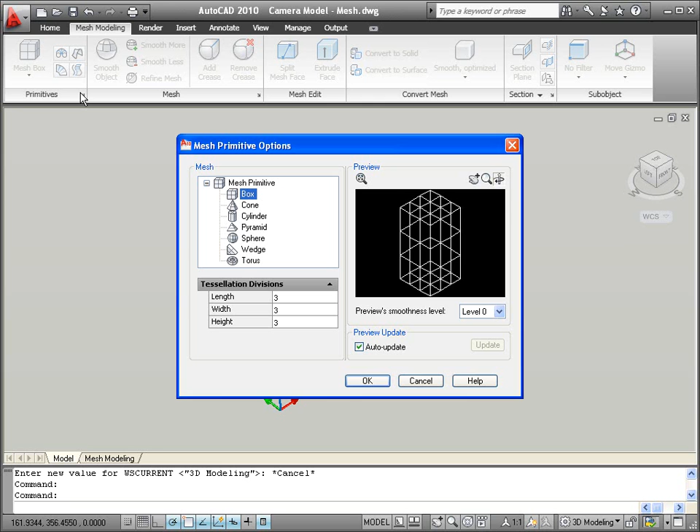You can specify default tessellation values for each type of primitive. To design the new camera body, for example, you might want a few additional tessellation divisions along the length of the camera. Begin drawing a simple mesh box, providing approximate values for the length, width, and height.

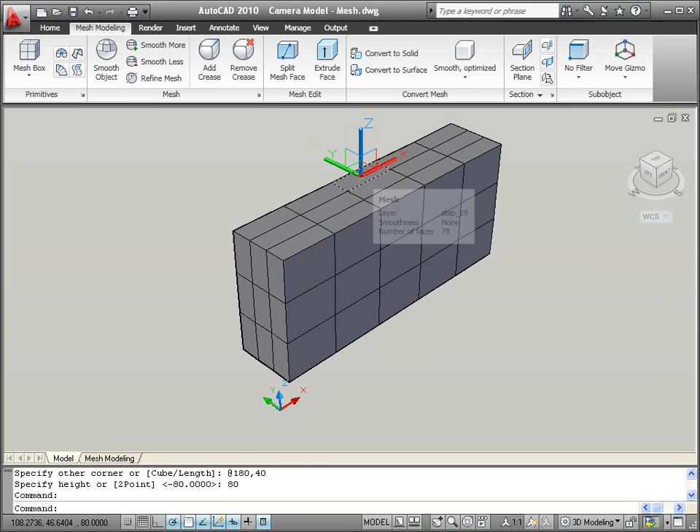Notice the additional mesh tessellations along the length compared to the width and height. Form the camera shape by editing individual mesh faces, pressing the Control key as you select each face.

The intuitive 3D gizmo automatically displays, enabling you to constrain the movement of the selected objects to a specific plane or axis. You can just as easily edit individual edges or vertices.

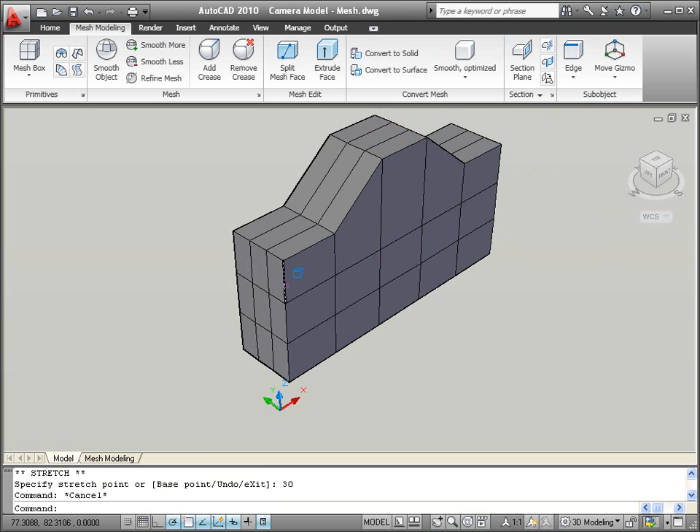A new sub-object filter makes it easy for you to specify which of these sub-objects should take precedence when you select. Setting the sub-object filter to edge, for example, ensures that if you select on the edge of a face, AutoCAD will choose the edge rather than the face.

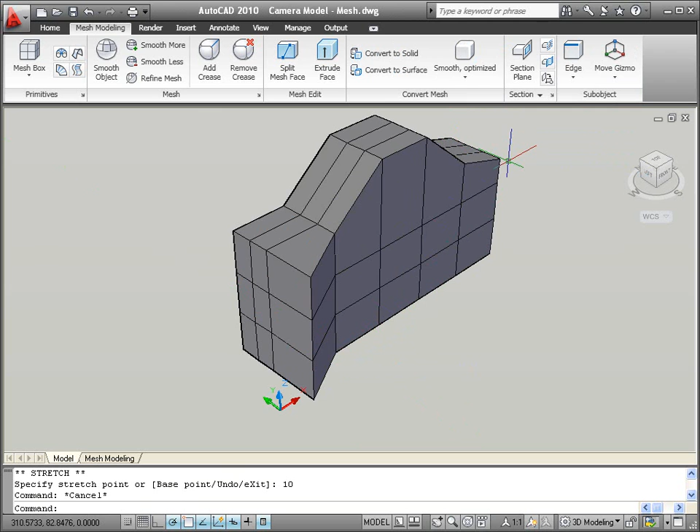To continue forming the camera body, you can stretch the front edges forward, and maybe you want to stretch the top edges down. The camera is starting to take shape, but it needs to be smoothed out. You can easily apply smoothness to the mesh objects, increasing the smoothness value as needed.

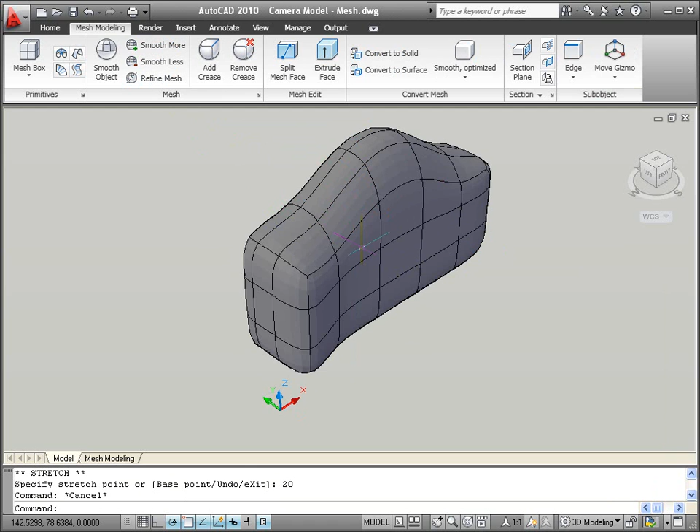Even after you've applied smoothness to the mesh, you can continue editing its shape. So far, we've used the 3D gizmo to move the selected objects, but you can also use it to rotate and scale objects.

Use it, for example, to scale the center face of the front of the camera body for the camera lens. Using the right-click menu on the gizmo, you can select the Scale option, and then, either from the right-click menu or the gizmo icon, constrain the scale operation to the ZX plane.

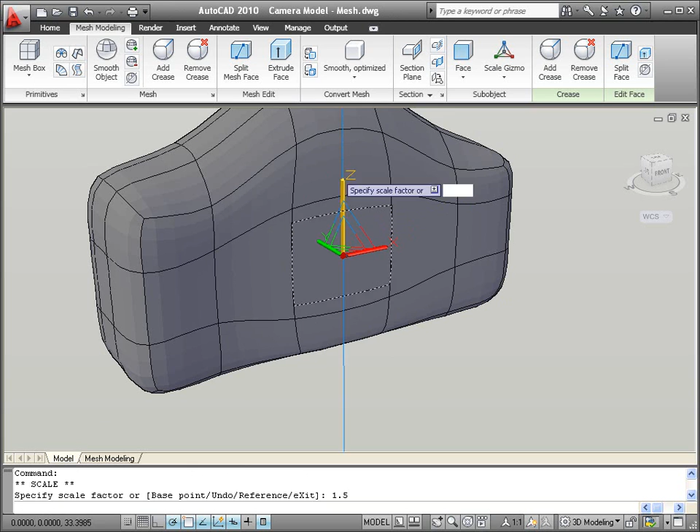To make the lens opening more symmetrical, you can perform an additional scale operation along the Z-axis, and maybe move it up along the Z-axis just a little. Now the face is ready to be extruded.

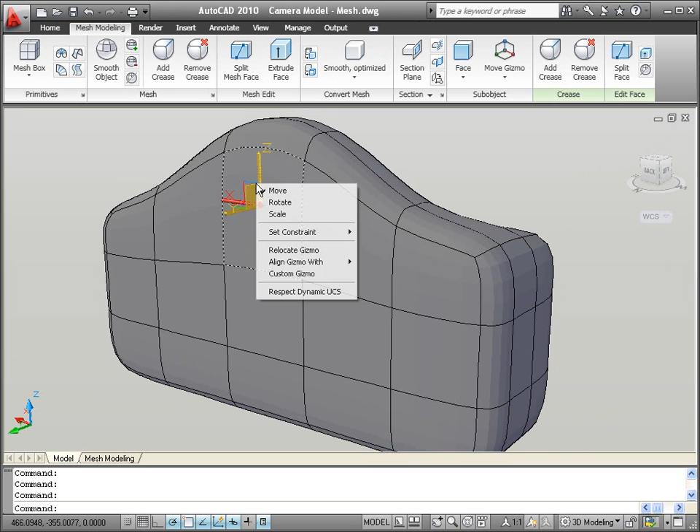You can use a similar process to form the eyepiece on the back of the camera. The intuitive and predictable sub-object selection and 3D gizmos combine with the powerful free-form capabilities of meshes, enabling you to create your models quickly and efficiently.

The eyepiece is almost done, but instead of having a curved lens, maybe you want it to be flat. The Crease tool enables you to crease selected mesh geometry so that it remains unaffected by the mesh smoothness. Notice the hard edges that are formed on the eyepiece lens.

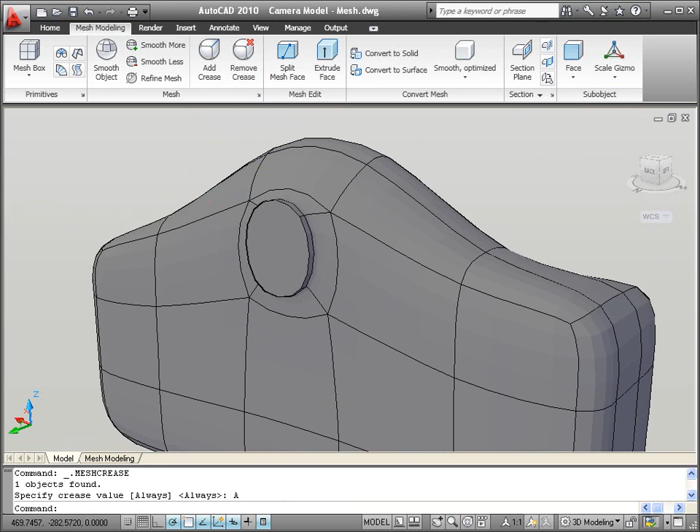Finally, you can scale down the lens and move it slightly into the eyepiece.